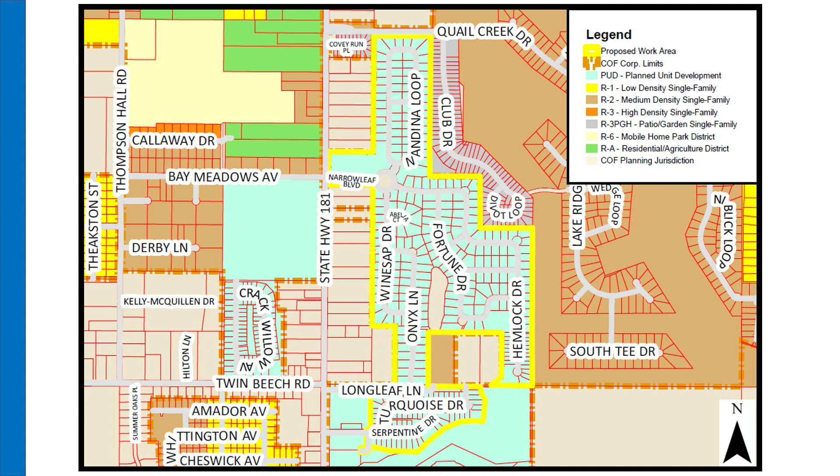This is going to be limited to Firethorne and portions of Stone Creek, as shown on the map and highlighted in yellow, so there's the aerial and the boundaries of work. This will be a combination of work in the right-of-way as well as through utility easements.

There's many crossings, and it is phased out like our utilities have requested so that we can locate those in a reasonable manner, broken out into 750-foot phases. For location purposes, they can't work in greater phases. These will require right-of-way permits.

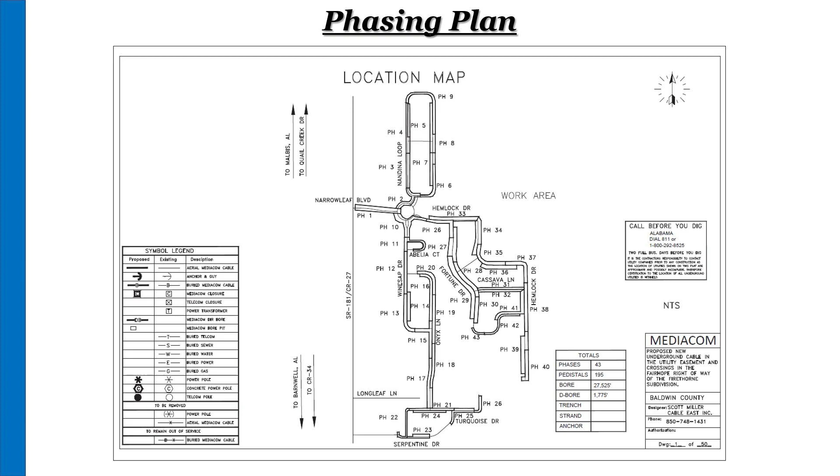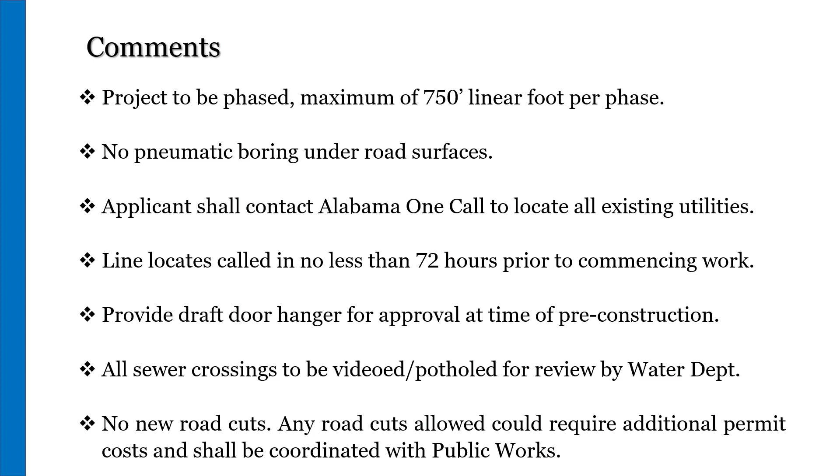This is a standard boilerplate for our contractors. They're subject to the business license. Right-of-way permits always kept with a contractor on site. We are requiring them to do hang tags on the doors and have a contact with MediaCom in case there's questions by the residents. They will be working in what appears to be people's front yards. As y'all know, this is oftentimes the right-of-way confused for front yards. So if there's questions, their points of contact will be on those hang tags, and we will approve those.

Standard ordinances of the city will apply. State and federal permits shall be on file if needed. And as-builts after it's done will be provided so that we can incorporate those into our utilities maps.

So the staff does recommend approval of UR 21.01 with 6 conditions. The horticulturist shall be consulted to determine if the required depth of bore must be increased so that no trees are impacted by the project. The contractor is responsible for any damaged trees.

At all street crossing locations, conduct potholing to determine exact location and elevation of existing utilities, reflect the exact elevation of utilities and GPS coordinates of the pothole locations on a set of as-built drawings. An additional right-of-way permit may be required for potholing procedures.

Follow-up activities required by staff and the applicant: upon satisfactory review and approval by the right-of-way construction inspector, as-builts will be submitted to the map tech for inclusion in GIS utility maps, provide draft door hangers for approval at time of pre-construction meeting, and provide a traffic control plan to the right-of-way inspector prior to commencement of any work. And I would like to add the 6th one, that no pneumatic boring will be allowed under paved surfaces.

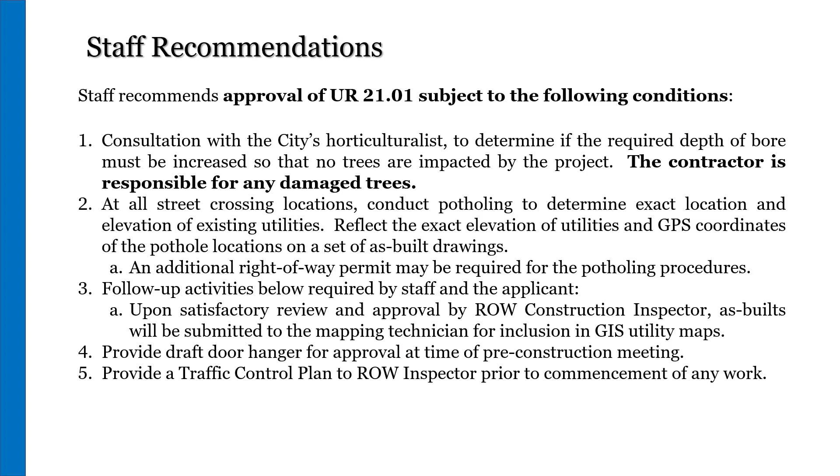That's all that I have for this one. I'll be happy to answer any questions. Thank you, Hunter. Are there any questions for staff at this time?

Is there anyone here on behalf of MediaCom? All right, this is not a public hearing, but does anybody from the public wish to have any input in this? If not, Director, Commissioners?

I move we approve UR 21.01, subject to staff recommendations. A second. I've got a motion and a second to approve, subject to staff recommendations, including number 6, including the pneumatic boring condition. Any further discussion?

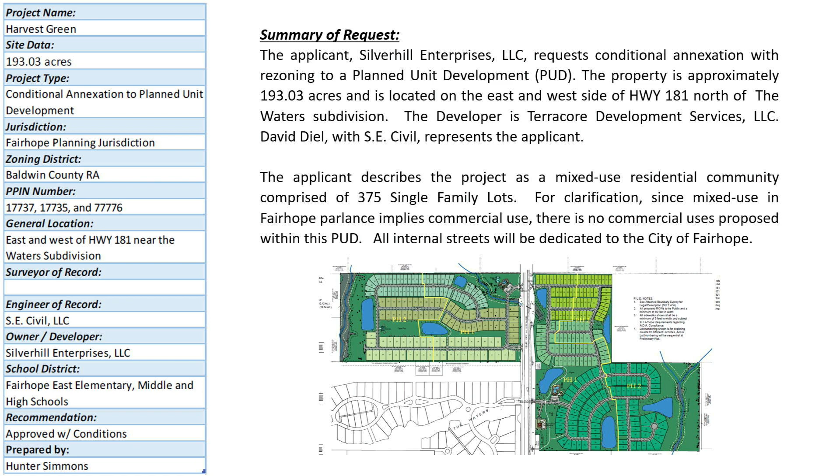This is a PUD, so it has a master development plan, and they've done it very well. You've got the narrative in your packets and also available to the public. Just want to clear up one thing: in our Fairhope parlance, mixed use typically includes commercial. This is labeled as mixed-use residential, but it has no commercial, so it's a mixing of lot sizes within one development.

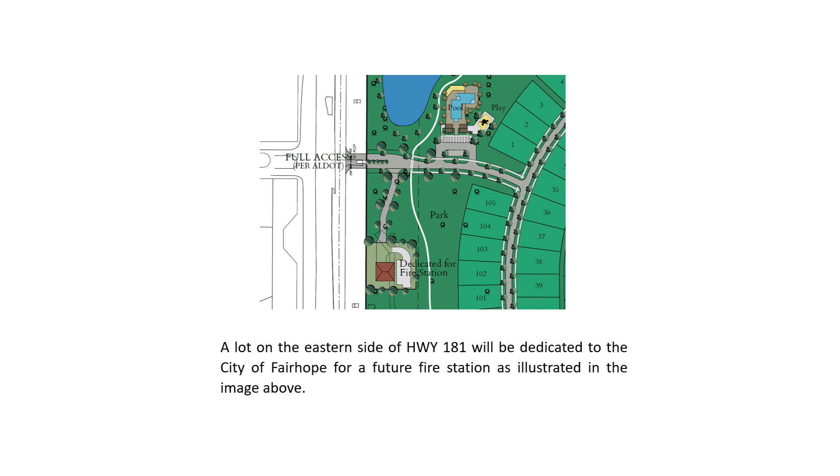I do want to point out there is a lot on the eastern side, across from the Waters entrance, that is projected to be a lot of record that will be turned over to the city for a future fire station. I think they've worked with our volunteer fire department to site this, as it's been an area of concern in this growing area, looking at how we grow fire service and hit areas with longer response times. So that lot is being dedicated to the city to be used for a fire station.

As we said, this is divided into east and west, and there will be 2 proposed developmental phases within each, east and west, coordinated as planned right now. So phase 1 of east will begin the same time as phase 1 of west, and then phase 2 will follow.

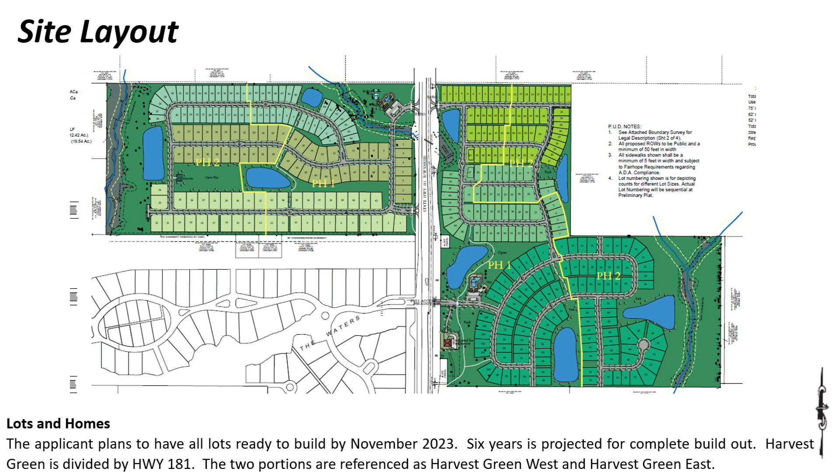As you all know, and I'll mention for the public, each of those phases will come back to the Planning Commission for a preliminary plat review, followed by final plat review. Many of the questions we might receive will be determined during those preliminary plat reviews. Being a PUD, we don't do a deep dive on the technical merits of drainage, traffic, and all of those things at this stage. We're looking at a pretty high level review at the rezoning and PUD approval process. Each of those things will be reviewed during preliminary plat.

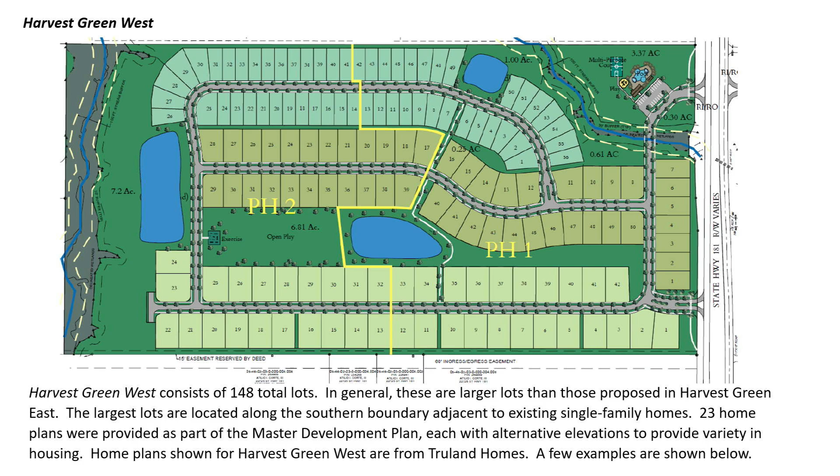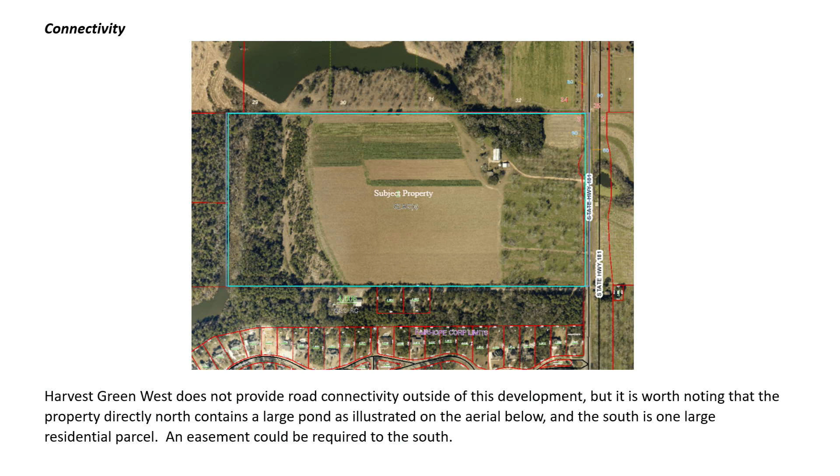This side of the property does not have too much connectivity. There's a lake to the north of the property and wetlands to the west. There is a potential for a stub out at the western portion of the southernmost road, as you can see, kind of the hammerhead. But the lot to the south of this property is residential at the moment, so there's not a lot of opportunity for connectivity on this phase.

When we move across the street to Harvest Green East, this is where we have a little bit denser lots, 227 total. There are 28 home plans provided as part of the master development plan, but each also has different facades and finishes available for more variety in the housing, so it does not look homogeneous.

The connectivity provided on this east side is available on pretty much all phases except for the wetlands on the easternmost portion, but north-south is provided. Where we looked at the fire station, that is approved by ALDOT as the only crossing from the entrance to the waters all the way across Highway 181. So the northernmost intersection will be right turn, right in, right out.

Some of the home plans provided for Harvest Green East are shown here, and again, there were 28, I believe, with alternate finishes.

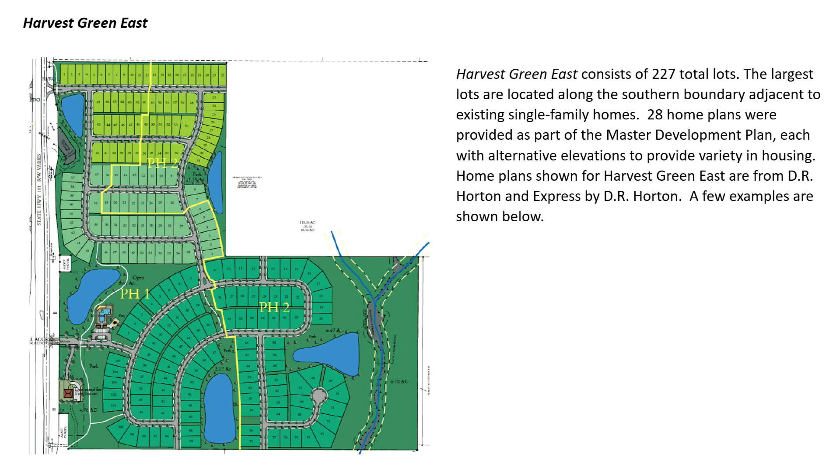I wanted to emphasize this on Harvest Green East - this came in late. On the northernmost portion of this site, where the small lots are to the north, they have proposed, and we highly approve, a 6-foot wooden fence with landscaping that will screen the property to the north.

From a pedestrian circulation plan, this is what you see on the screen, and anything in red is a 5-foot sidewalk that meets the conditions of our subdivision regulations. What you don't see on this plan is traffic calming, which has been added within the site plan of the PUD.

I do want to highlight, I think one of the big positives of this development, is the green space. Almost 49.93 acres, or almost 26% of the total site, is preserved in green space.

In addition to the required buffers on the site - you can see the dashed lines here, that's our required buffer, stay out of those areas is kind of what we tell developers - you can see a lot of these lots provide additional buffering in front of those blue lines in wetland areas.

I'll show another green space area so it's a little easier to see. I want to call attention to this because we do ask for pedestrian walkways, sidewalks along Highway 181. There are wetlands on Highway 181, so our concern was getting that pedestrian connectivity to the north and the east.

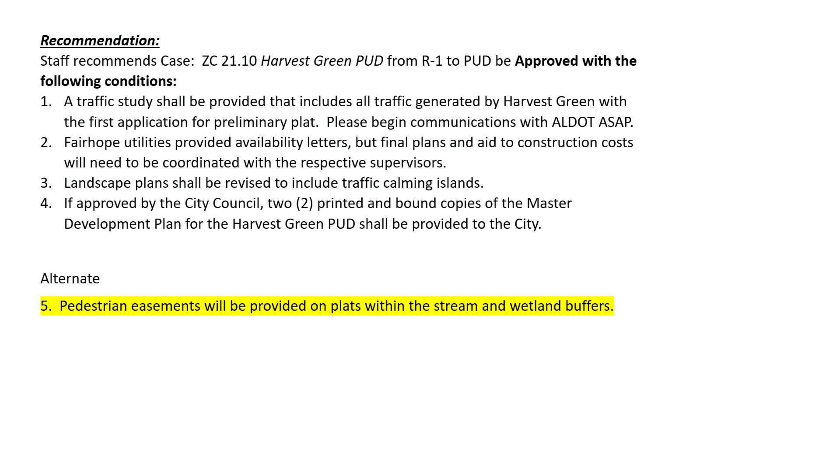The alternate there was about the wetland buffers and pedestrian easements. I suggest we listen to the other side's comments on those because they haven't had time to really get back with us. So that's all I have. If y'all have any questions, I'll be happy to answer.

Thank you, Hunter. Any questions for staff at this time? I was just - you mentioned briefly the automobile connectivity to the waters, and it looks like there's that stub out to the north in the waters, so I was wondering why isn't that a condition of approval since we want connectivity? This piece of property right here is not a portion of the waters.

Okay, that's not a buffer, that's separate. That's right, sorry. Yes, that is privately owned right now, 3 lots. That's a strange piece of property. Yes, that is 3 lots. That is not a common area of the waters.

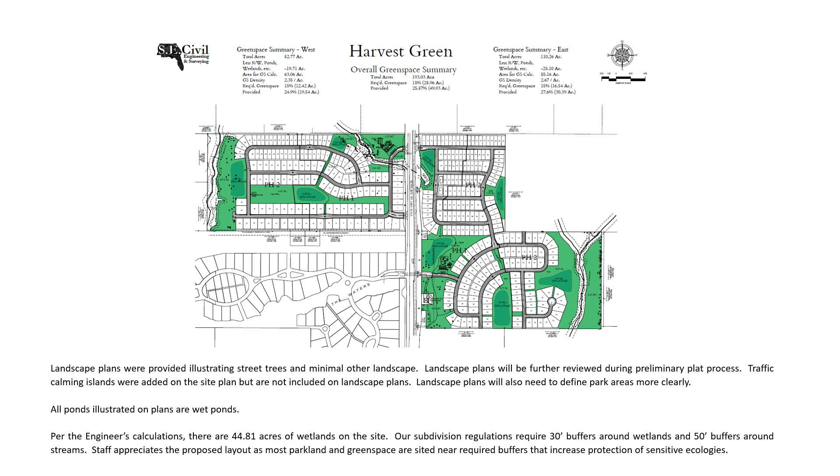Okay, so not something that can be required right now. That makes sense, okay. But we could still do a stub out there, couldn't we? I mean, like we did on the waters, if that were ever redeveloped - just you know, line it up, 2 stub outs. They could have a road down the middle, lots on either side backing up to Harvest Green and the waters, and have an intersection there and have their connectivity from them.

Because it looks big enough. What size are these lots in Harvest Green? I don't see any sizes on them.

Yes, and I do believe TerraCore will have a little presentation on here. They've clearly shown those, and it was in the staff report. I didn't pull that on the slides exactly, but it's in there. Once we get through here, they do have a slide that will show those lot sizes. There's 3 different lot sizes on the west side and 3 different lot sizes on the east side. They vary a little bit, larger in general being next to the waters.

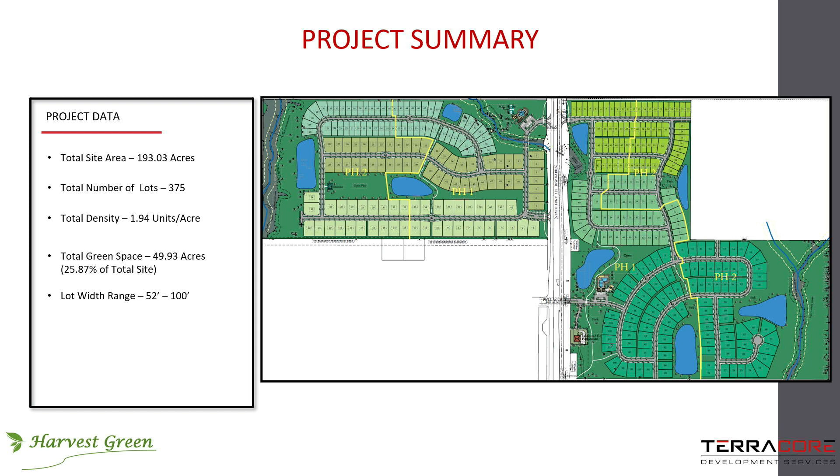Harvest Green West is a total of 82.77 acres, about 148 lots, and it's not exact, but it's about a third of each lot size, with the largest lot size to the south, closer to the waters, then medium, then the smaller lot sizes. In Harvest Green West, the smallest is a 56-foot lot, with the largest being a 100-foot lot.

One of the issues we have is there's going to be a drainage ditch flowing along that southern line. As far as the question about a stub out, in conversations with that property owner, they don't want any type of potential access through them, so we're trying to honor that, just like we're honoring the landscape buffer from the other adjacent property owner on the east side. That's kind of where that came from, just honoring requests from the adjacent property owners.

And I'm guessing the Waters probably doesn't want us to connect any one day either. Yeah, but that's why we put the stub there, was to connect.

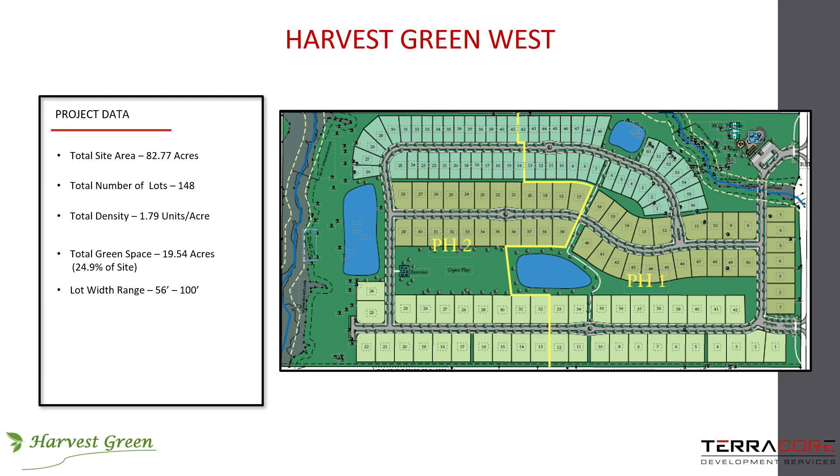On the west, we have several amenities, including a pool, a playground, pavilion, restrooms, basketball court, an open rec area, and a community trail system going through the wetlands that Hunter had mentioned earlier.

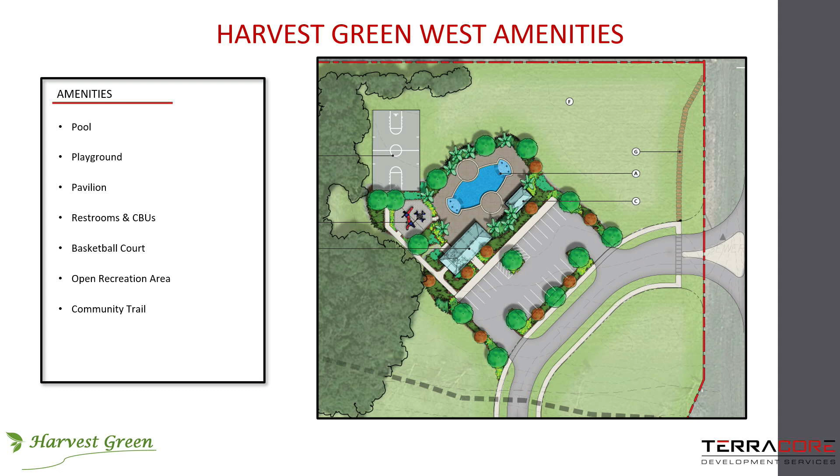Here's where we're discussing the lot sizes. As I said earlier, on the west side, the smallest lot is a 56-foot lot. We also have 82-foot lots and then 100-foot lots. It's close to a third of each lot size within each development.

Hunter mentioned there's a lot of different house options. We put a few more in the presentation than what he had, but within the full packet, if y'all have those, you can see the different house options that people will have to choose from.

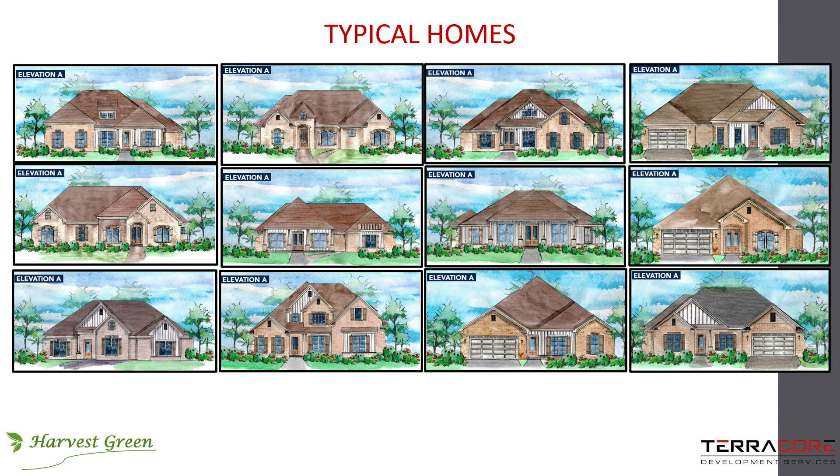Harvest Green East is a total of 110.26 acres with 227 lots. That's just over 2 units per acre, with total green space of 30.39 acres. This one has a lot range from 52 to 75 feet. The amenity package includes the pool, playground, pavilion, restrooms, pond, open rec area, and community trail system as well. Lot sizes here range from 52 to 75 foot, and again it's a kind of even distribution on those lot sizes.

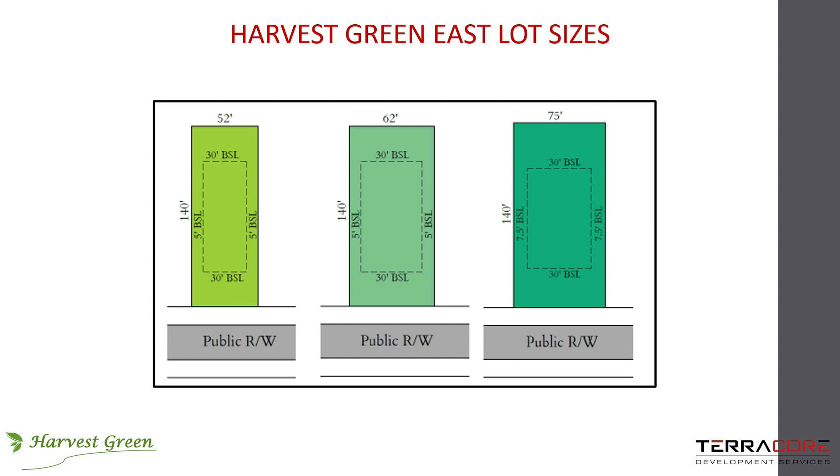I'm going to back up a few slides and point out the area Hunter was mentioning. In the latest ISO report, this general area was mentioned as a place where the city needed a fire station. So in our early talks with the city, we said we could gladly provide an area for that. We're proposing that off of the main entrance that lines up with the waters, because that's the only full access location we would have along 181, along the entire frontage here. That way the fire trucks could go north or south from that area, down towards the main entrance on the southern side.

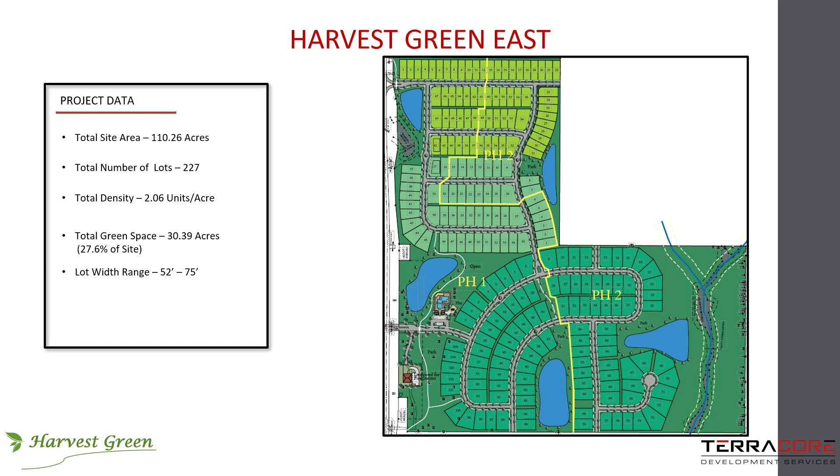And here are some of the typical house plans for the east side of 181. All right, and that's all I've got. I'll answer any questions that y'all have.

I've got a question, Larry. What about with Publix just south of here?

Y'all have any thought about sidewalk access along 181? What does AlDOT typically allow? This is 300 and some odd lots that are within walking distance, but that doesn't get you out on the sidewalk that's going to get you down to Publix. Any thoughts on that?

So we're proposing sidewalks, but as was mentioned earlier, there's some drainage areas that are a concern, and we're trying to get you in and out within the confines of the property. If you're going from one side to the other, you should be able to hit it, if there was ever another project to bring sidewalks in front of the residential property to our south, and then in front of the Waters, and so on. But AlDOT doesn't typically want their... thank you.

I'm thinking about something to the north. You've got sidewalk that'll bring you through the development and out to 181, but what about when you've got somebody to the north of you?

Well, that's what I was saying. If you look at the blue line at the very north of the property, if you're heading south on 181, we'll have a sidewalk along 181, and then they'll enter into that internal road system that we're permitting with the culvert with the Corps, and then come back out. So you'll just dive onto that one road and then come back out, versus trying to cross those wetlands in multiple places, because AlDOT's not going to let us do it in the right of way.

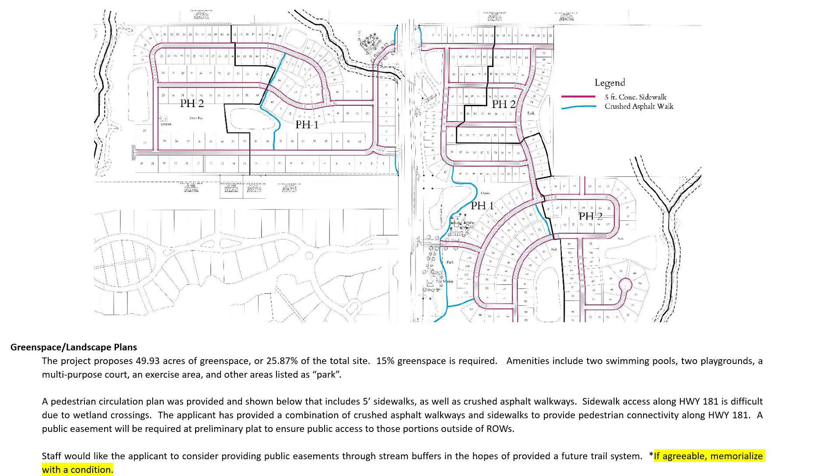I love it, it sounds great. Well, if you don't dream, you can't ever get anything done. A lot of towns have that dream, but I just don't want to be misled on what you're conveying. Oh, no.

The question came up this past week, and I'm completely okay with that. There's been short time for them to contemplate the legal issues and liabilities, so it's something we can look at on the preliminary plat if it's feasible. That was not something we need to address tonight.

For the pedestrian easements, we weren't asking anybody to install anything. But there's national parks grants and things like that available, so that if we ever had enough where they were actually connected to something other than isolated developments, then we can look at a more global approach of how to connect all of those in an environmentally friendly project.

Kind of like the Cahaba River up in Birmingham. Blue line, yeah, like kind of those blueways, blue line walkways, birding trails and greenways.

This is probably the next level of development kind of question, but when you have a sidewalk arrangement like this, and again I think that's a creative solution, I'm not opposed to it, but you go into the development now, and it is a public street. Are there any best practices to make that feel welcoming and not make it feel like, oh, I'm about to go into a private development, I should turn around, I'm not welcome here?

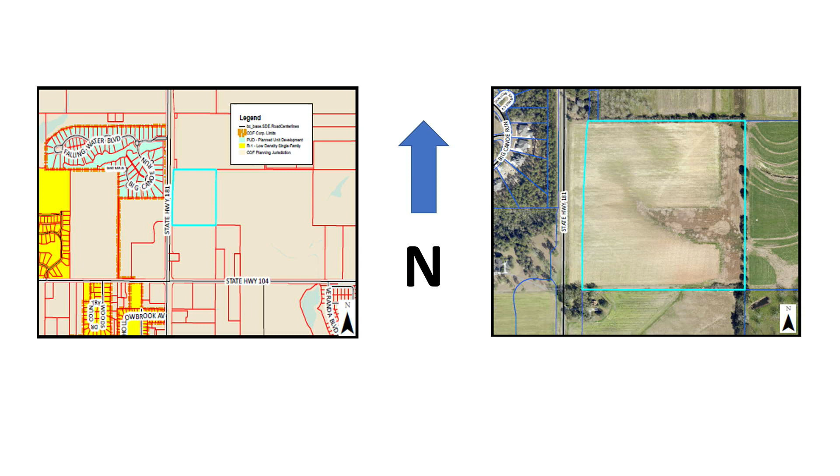A traffic study was completed, and the recommendation was a northbound right turn lane installed, shown on the plans. The improvements by ALDOT currently for 181 do not include median access at this location, so it'll be a right out only, requiring a U-turn at the next available access, potentially at the Waters subdivision, to go south.

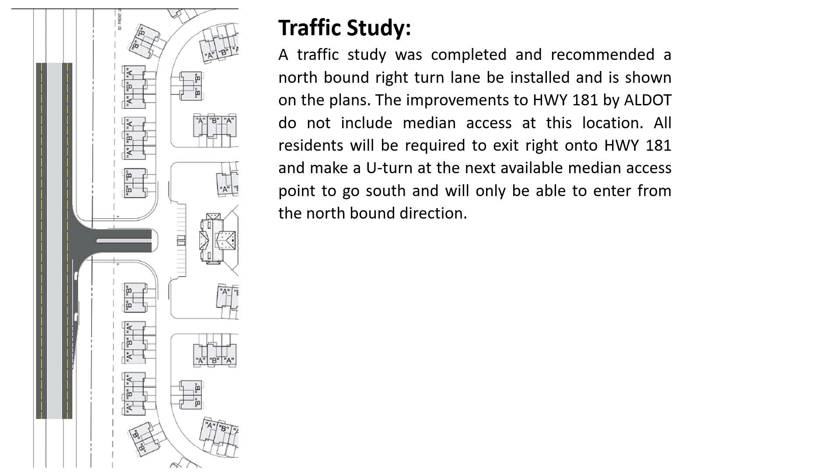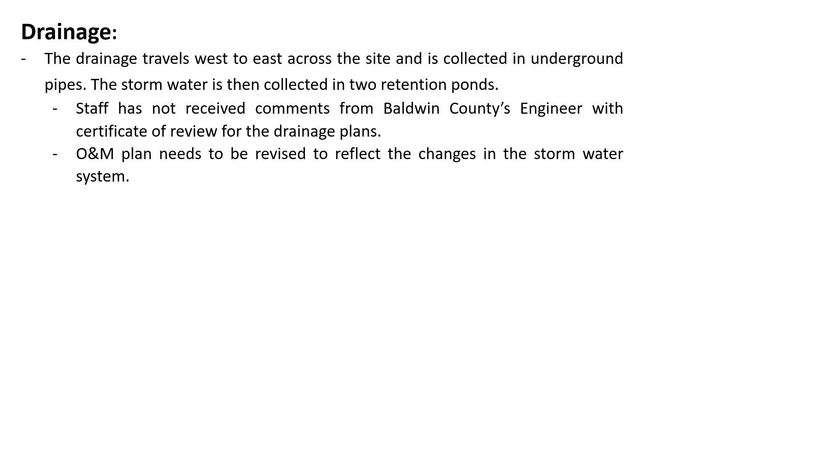The drainage in general travels west to east. The site is primarily flat and runs east across the site. It's collected in underground pipes, then into two retention ponds. Staff has not received any comments from the Baldwin County engineer on their review of the drainage plans. The O&M plan for that drainage system will need to be revised to reflect changes made in the stormwater system.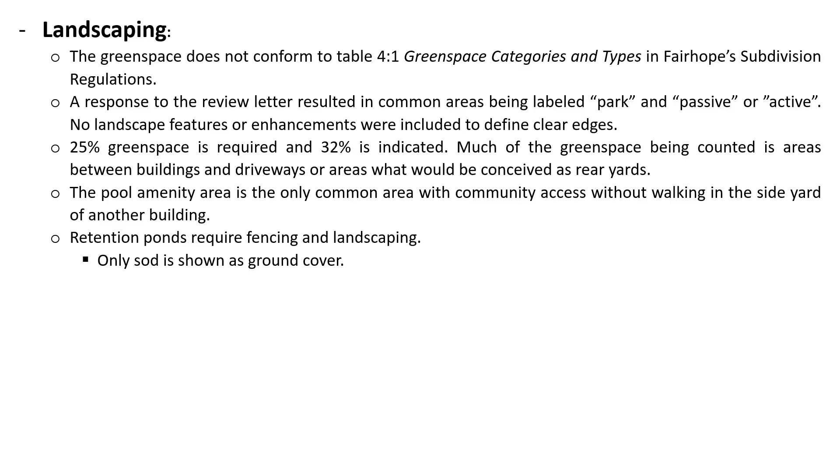So that's the recommendation for the waiver request: to deny. Overall recommendation, due to the lack of connectivity, the private streets, and other small issues left unresolved, leaves a request for denial.

The applicant is here this evening, Mr. Tom Mitchell, along with Doug Chafin with Sawgrass Engineering, who can answer any questions, and I'll be happy to answer any questions on behalf of staff.

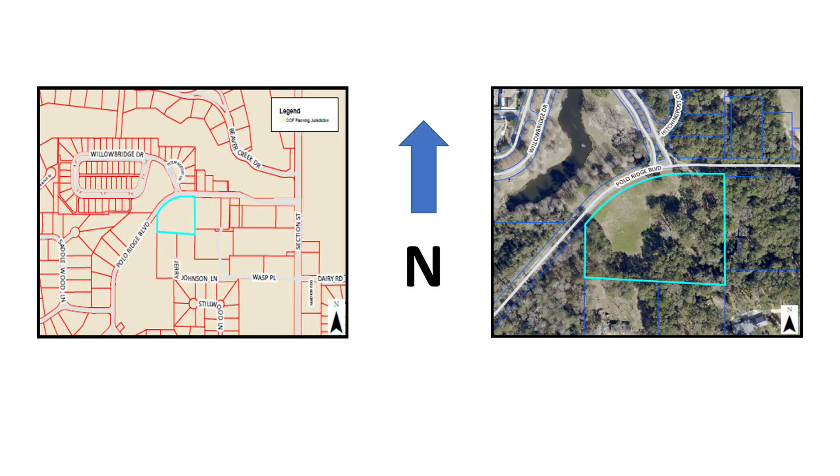Thank you. All right, next item on the agenda is SD 2135, correct? Am I in the right place? SD 2135, public hearing to consider the request of Craig Homes, Inc. for plat approval of Point Clear Estates, a 3-lot minor subdivision. This is Point Clear Estates, minor subdivision. The property is approximately 3 acres, located at the intersection of Polo Ridge Boulevard and Willowbridge Drive. This property is unzoned as well.

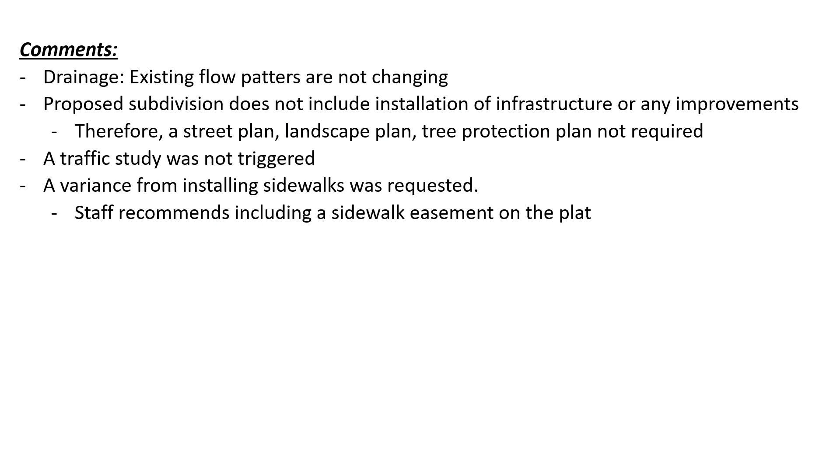A variance from installing sidewalks was requested. Staff recommends including a sidewalk easement on the plat, which is in our subdivision regulations, so no waiver is required, just adding that easement onto the plat. It's very similar to a 3-lot subdivision done across the street in Polo Ridge, where a 10-foot sidewalk easement was included on the plat to allow for a future sidewalk.

Staff's recommendation is to approve with the following condition: a revision of the plat to illustrate the sidewalk easement along Polo Ridge Boulevard. Staff, can I ask you a question? Yes, sir. I'll be happy to answer any questions.

There was a variance or waiver requested, and Seth was representing the client, and the client's here, so if I say anything wrong, please correct me. The request actually came in that they would put the sidewalk in the right-of-way, but asked for a variance from the requirement to do that. We require that right now—if you're going to put a sidewalk in, you have to install it. We've amended the subdivision regulations to require that, and you saw that on Melanie's place last month. What staff does not want to see is these waivers where some people have to install sidewalks and some don't.

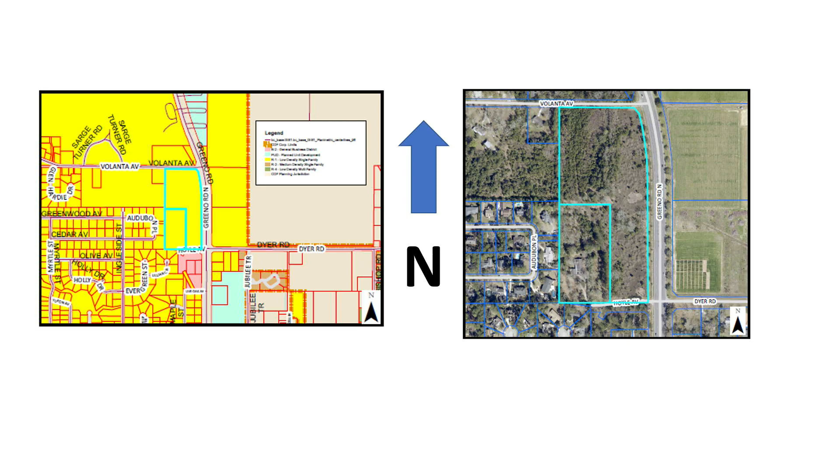So first we'll get to the utilities. What I'll say is what we're doing here is pointing out the items needing clarification, and then we're getting out of the way for our utility supervisors to handle their business. So water will be provided by Fairhope.

It will utilize a master meter to service the large building on the north side of the property. Easements may be needed and will be provided as necessary. Aid to construction may be in play there.

Sewer is provided by Fairhope. There will be, as designed right now, a private lift station located on site. Capacity needs have yet to be finalized but will be reviewed by the sewer superintendent, and connections to Fairhope Sewer will include aid to construction cost. Easements, as stated, will be provided as necessary.

The power is provided by Fairhope as well. Last we heard, the loads are being determined between Fairhope and the engineers. Transformer pads will be built to Fairhope specs. Fairhope will supply the transformers and primary conductor. Lighting will be the responsibility of the developers, and again, easements will be provided as needed.

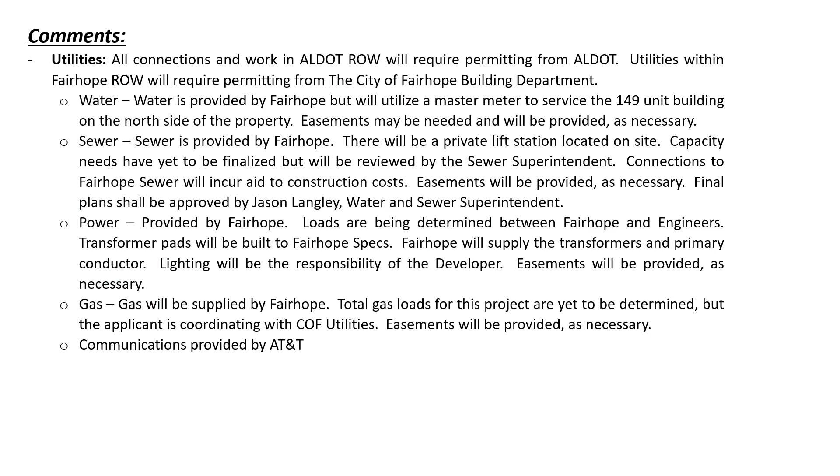Gas will also be supplied by Fairhope. Those total loads are being determined, and the applicant is coordinating with Fairhope Utilities. Communications will be provided by AT&T.

So as at the PUD, a wetland delineation report was provided. No wetlands, either jurisdictional or non-jurisdictional, were found on site - all uplands. As for the drainage narrative, the drainage generally flows north to south, and approximately 9.5 upstream acres are flowing onto the site.

That is being contained within the site pretty well - you can look at the narrative and look at the stats and see what the pre and post development flows are. The post-development flows are less than required, and the TSS removal is being met. That is flowing down to an existing 24-inch culvert.

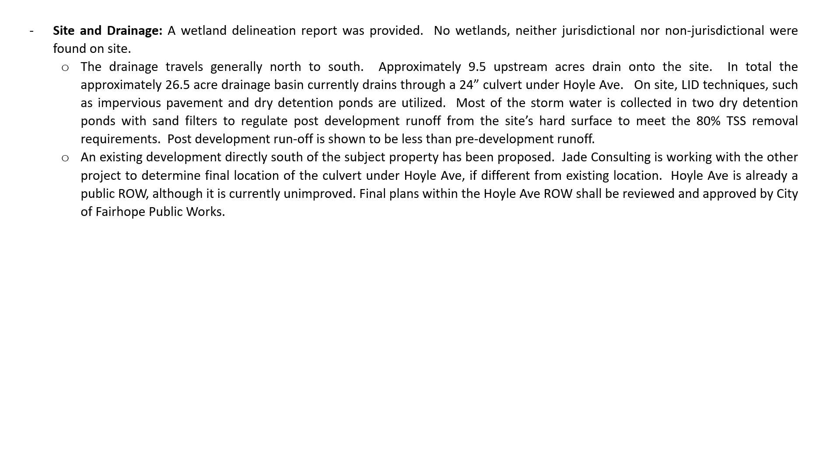That culvert is on what is Hoyle Avenue right-of-way, but not an improved right-of-way. As part of this project, the road on Hoyle will be improved. There's a potential project just to the south that I believe the engineers are working with that may relocate that culvert and point of discharge, but if that happens, it'll need to be approved by our Public Works Director, Richard Johnson.

General comments - all site work, we've kind of asked how this is going to be built and developed. So site work is first by the plan, getting the site ready with infrastructure, followed by construction of the main building, and finally the cottages.

The applicant did agree to provide a signalized crosswalk at the existing crossing south of this property across Volanta, a signalized crosswalk. We'll work with the Public Works Department and Richard Johnson for that construction. Internal roads will be private and will require naming and addressing.

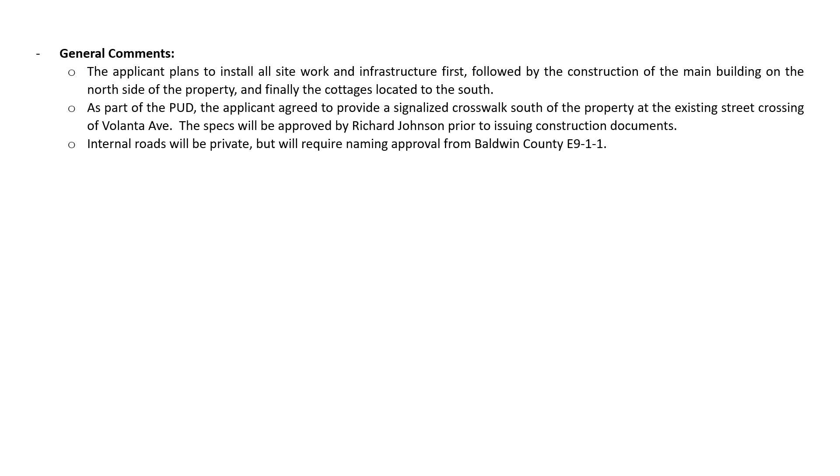I did mention, I think in the staff report, that they have not spoken with ALDOT yet. That conversation has been started and generated.

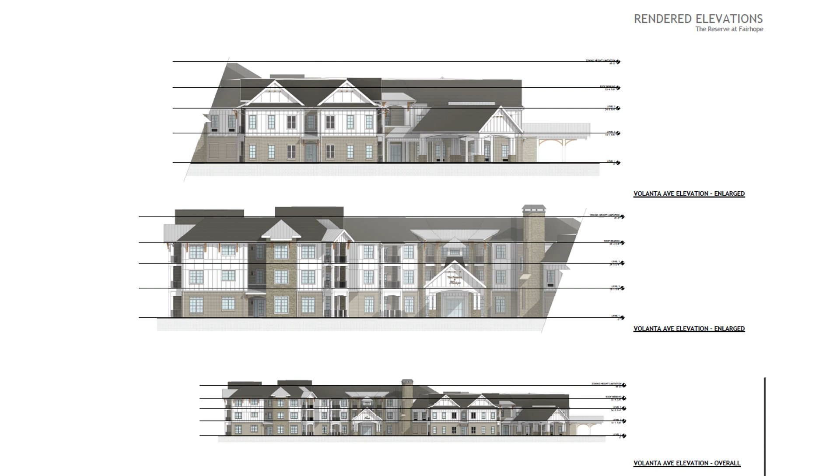So staff is recommending approval of SD 21.37. The conditions we have are to memorialize some of the lingering issues.

Traffic improvements recommended by the traffic study and/or ALDOT will be installed by the developer, or under an aid to construction MOU with the City of Fairhope and/or ALDOT, prior to CO.

Road name shall be approved by Baldwin County 911. Addressing will be provided by the City of Fairhope and shall be complete prior to the submittal of the building permits for vertical construction.

Final location of the culvert under Hoyle Avenue shall be approved by Richard Johnson with the City of Fairhope Public Works. Hoyle Avenue is an existing right-of-way. Improvements shall be installed by the developer, will require a certificate of acceptance, and shall be warranted and bonded. Because it's an existing right-of-way, we don't have the traditional acceptance process, so the certificate of acceptance of the improvements within that right-of-way will need to go to our city council for approval.

The signalized crosswalk will be approved by Richard Johnson with the City of Fairhope Public Works. Final placement and aid to construction costs for all utilities shall be approved by the respective superintendent. Aid to construction costs shall be determined prior to application of building permit.

And that should read prior to receiving the building permit. We received the permit and we're sending that off - Eric Cortinas in our building department is sending that off because of the medical needs and how big of a project it is, to Birmingham. There's a code review service that we can pay for, so he's reviewing that.

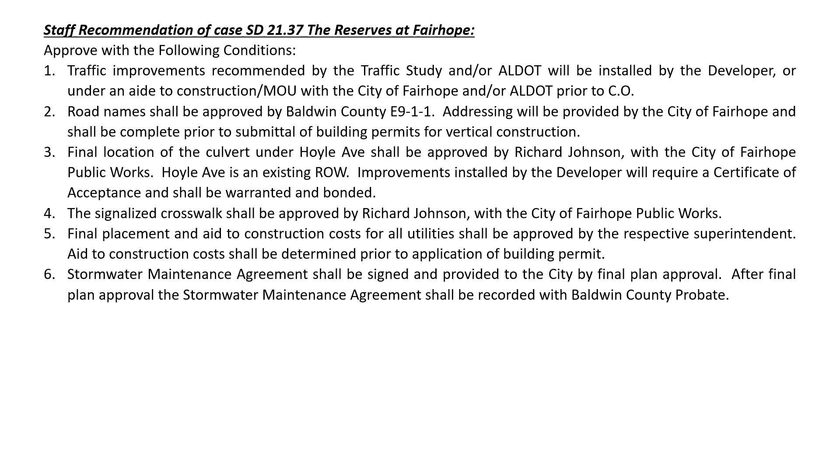Just have a quick question about the retention, the stormwater management area to the south. It feels like it's right on that property line, and I didn't know what kind of buffering would exist between the residential properties to the south and that pond. It's just right up on it.

I might have picked up the green space drawing, something with a color looking out on here. If you'll look in your packet on the landscape plans, I believe that will show the limits and the landscape provided along that boundary. I just hadn't found it. I see green hatch in other areas, and obviously it's not paved, it's stormwater. I didn't know though, is there a fence? Is there a tree buffer? What is the buffer between the residential?

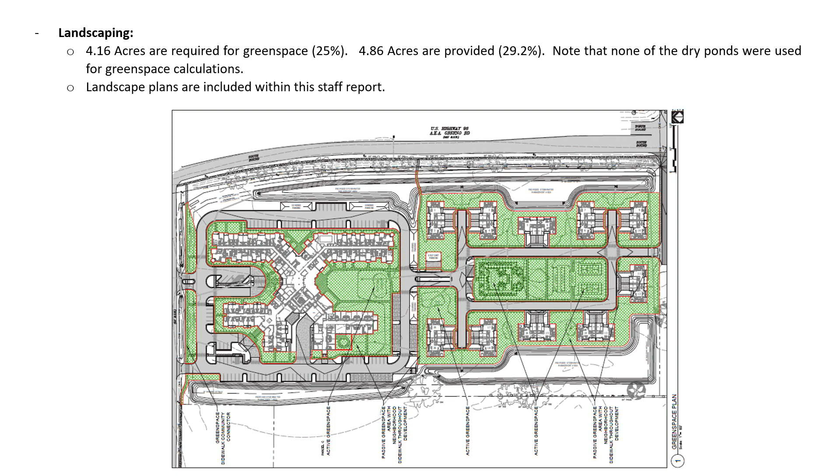I'm going to let Trey explain that one, since he designed it. But let me ask you a couple questions before Trey comes up. Sure.

Under traffic, it says that the development will only add 4 vehicles during the afternoon peak time. Okay, that's the first question.

Second question is, if this is kind of an assisted living type of facility, they're not going to be people with full-blown automobiles, but they're going to be a lot of people with electric cart vehicles, I'm assuming. All right, okay, I'm just assuming. That's all, that's enough said on that.

What does it mean that the applicant submits that existing conditions require the turn lane? I guess that's on Volanta. What does that mean? I don't understand what that means. The existing conditions, so who's going to put them in? If it already requires it, then we're going to put this facility here. Who's going to put it in there?

Okay, let me -- all right, you want to answer that? I'm not going to be able to remember them if you keep going. Go ahead, if I can get them one by one. I've got a few more too. Yeah, so first one, give me the first one because I've already thought of the third one.

The turn lane. So the traffic study that was provided required a turn, or mentions that a turn lane is warranted coming on from Greeno onto Volanta. A right turn lane is warranted coming south on Greeno, onto Volanta. All right, and you are correct.